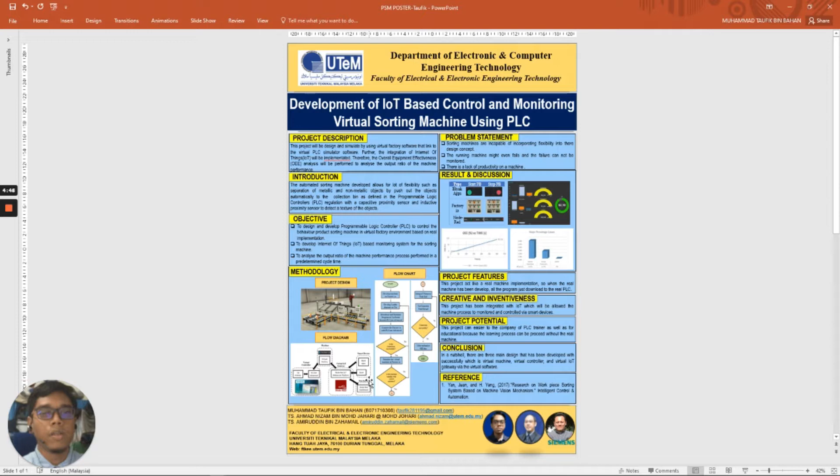Today I will present my final year project, which is mainly about the development of an IoT based control and monitoring virtual sorting machine using PLC. Okay, I will proceed with my presentation via poster. As I mentioned before, my project title is Development of IoT based control and monitoring virtual sorting machine using

PLC. For the project description, this project will be designed and simulated using virtual factory software that links to the virtual PLC software. Further, the integration of Internet of Things, IoT, will be implemented. Therefore, the overall equipment effectiveness, OEE, analysis will be performed to analyze the output ratio of the machine performance.

Next, for the problem statement: firstly, sorting machines are incapable of incorporating flexibility into their design concept. Second, the running machine may even fail and the failure cannot be monitored. Lastly, there is a lack of productivity on a machine.

For the introduction, the automated sorting machine developed allows for a lot of flexibility, such as separation of metallic and non-metallic objects by pushing the objects automatically to the collection bin as defined in the programmable logic controller, PLC, regulation, with a capacitive proximity sensor and inductive proximity sensor to detect the texture of the objects.

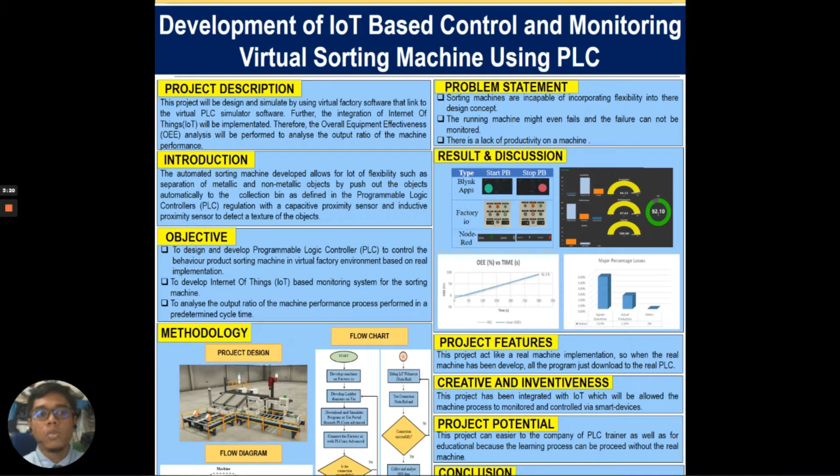The objectives of my project are to design and develop a programmable logic controller, PLC, to control the behavior of a product sorting machine in a virtual factory environment based on real implementation; next, to develop an Internet of Things, IoT, based monitoring system for the sorting machine; and lastly, to analyze the output ratio of the machine performance process performed in a predetermined cycle time.

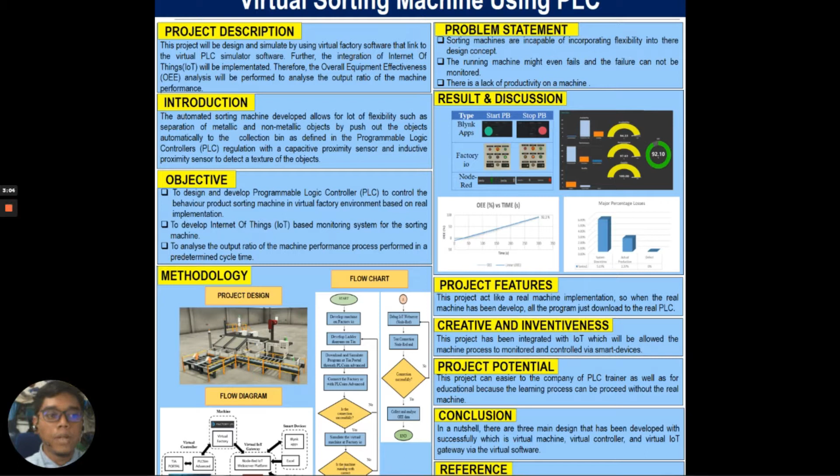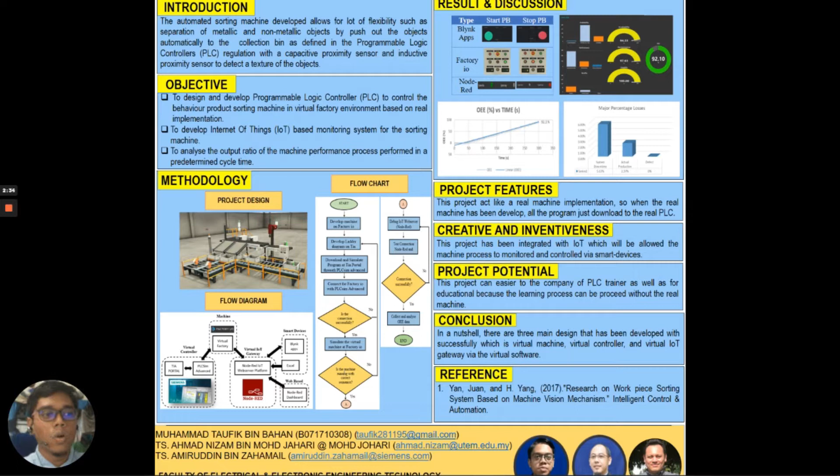For the methodology, this is my project design that I designed in Factory IO, which is the virtual factory software. This is just like a real machine implementation. What we can see here is a real conveyor and real solenoid actuators, solenoid valves that push the metal or non-metal object to the collection bin.

This is my flow diagram: firstly the virtual controller, then the machine, then the virtual IoT gateway, and then integration with smart device and web base. Firstly, the TIA Portal is linked to PLCSIM Advanced as the virtual controller of this machine, then integrated with the virtual factory, Factory IO, which is this design, acting like a real machine.

Then it goes to the virtual IoT gateway, which is the Node-RED IoT web server platform. It will send data for controlling and monitoring the machine process via the Blynk app and Node-RED dashboard. This Excel is to log the OEE data produced by the machine in 5 minutes.

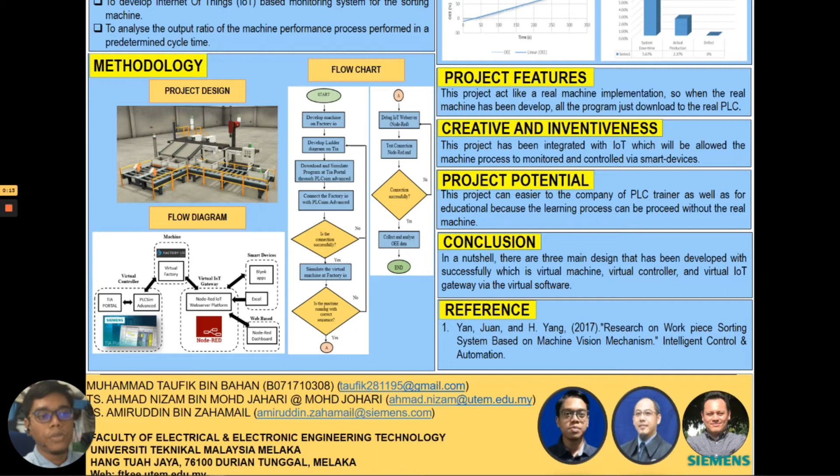This is my flowchart. Firstly, start, then develop the machine on Factory IO. Next, develop the ladder diagram on TIA Portal. Then download and simulate the program at TIA Portal through PLCSIM Advanced. Then Factory IO will connect with PLCSIM Advanced. When the connection is successful, the virtual machine at Factory IO will be simulated.

If not, it goes back to developing the ladder diagram again. If the machine runs with the correct sequence, the IoT web server can be debugged. If not, go back to develop the ladder diagram on the TIA Portal. When the IoT is successfully debugged, test the connection of Node-RED with PLCSIM Advanced and Factory IO.

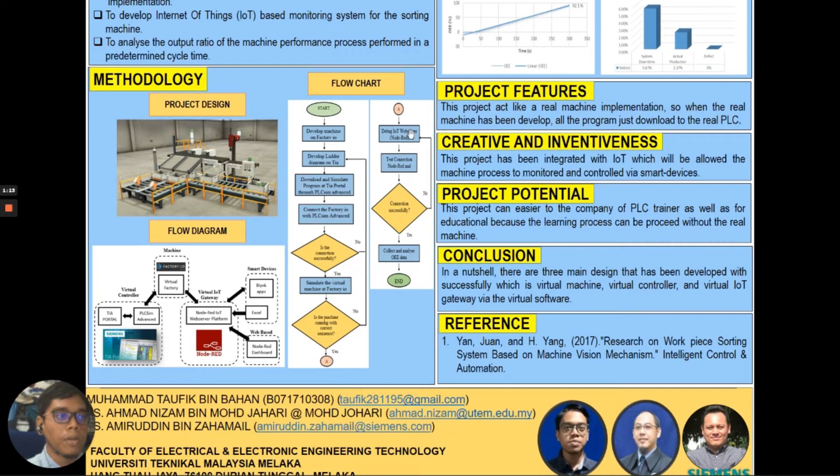If all the software is connected, which is PLCSIM Advanced, TIA Portal, and the IoT web server, then collect and analyze the OEE data. If the connection is not successful, go back and debug the IoT web server. It may be caused by the flow nodes or the programming at the IoT. Then end the project.

For the results and discussion, this is my Blynk app, Factory IO and Node-RED. When the start PB is pressed, the Blynk app shows a green light, Factory IO also turns green, and at Node-RED the green light is turned on. When the stop PB is pressed, the Blynk app shows the red light turned on, the same with Factory IO as well as the Node-RED dashboard.

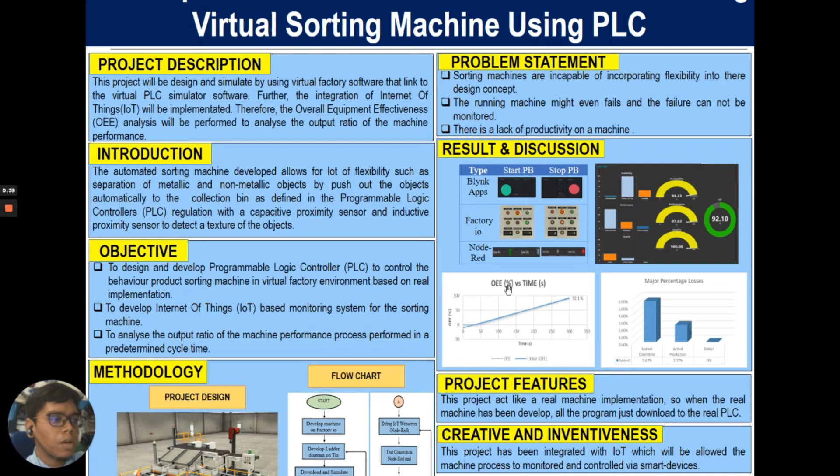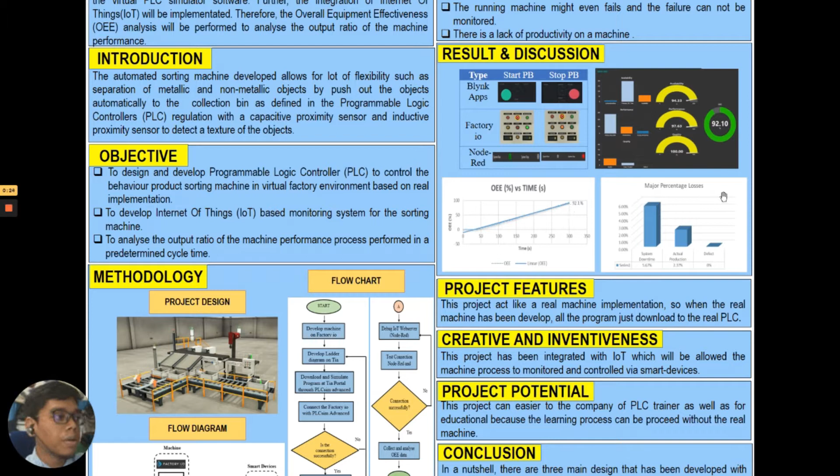This is the OEE data developed at the Node-RED dashboard. This is the calculation to find the availability, performance, and quality. This is the percentage of availability, performance and quality. Then this is the OEE percentage. This is OEE percentage versus time in seconds, which is 92.1%. This is my major percentage losses, which consist of system downtime, actual production, and defects.

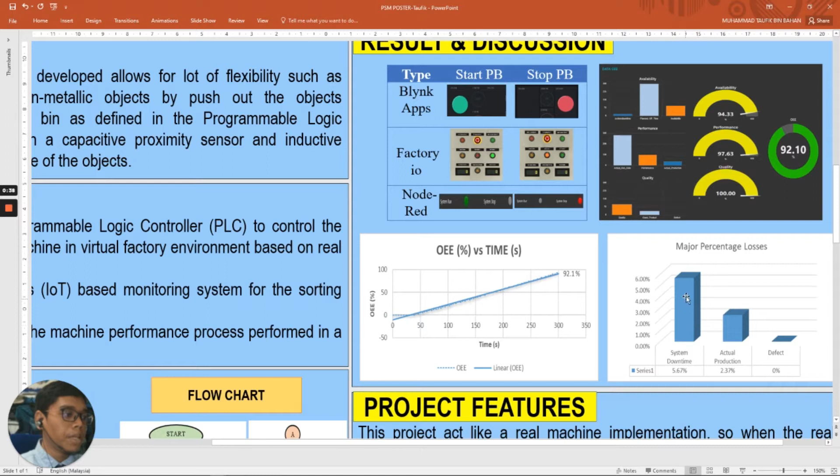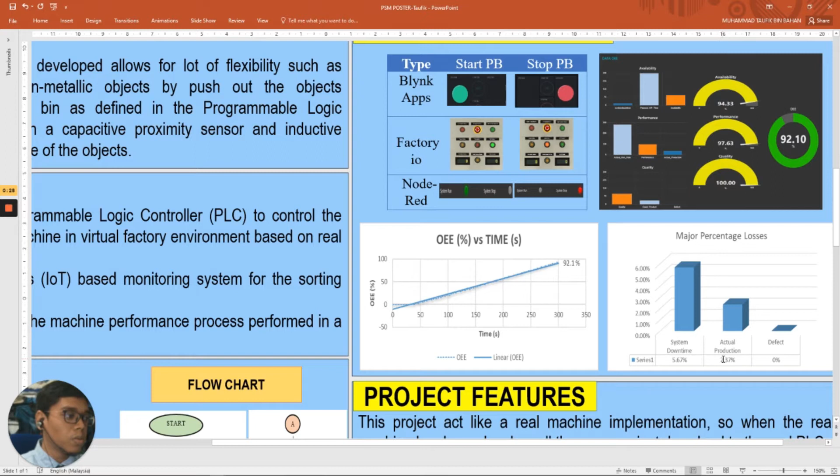The main defect for the OEE percentage is system downtime, which is 5.67%, then followed by actual production, which is 2.37%, and defect is 0%.

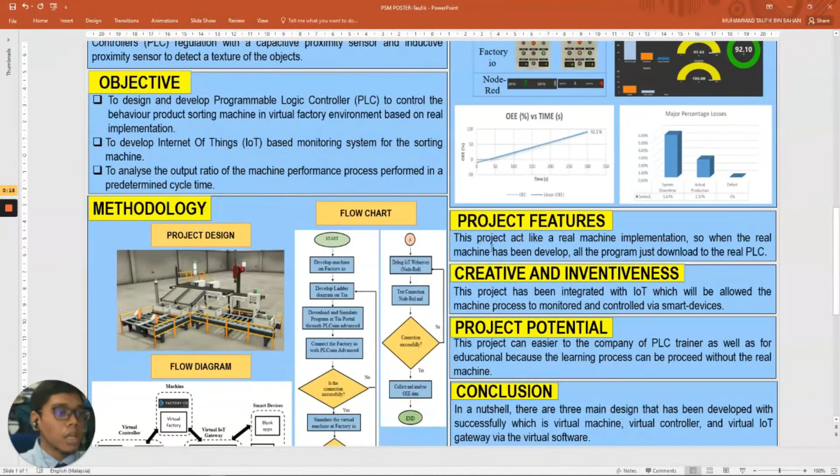Next for the project features. This project acts like a real machine implementation, so when the real machine has been developed, all the program is downloaded to the real PLC.

For the creativity and inventiveness of this project, it has been integrated with IoT, which allows the machine process to monitor and control via smart device.

Then for the project potential, this project can be easier for companies with PLC trainers such as Siemens company, as well as for educational purposes, because the learning process can proceed without the real machine.

For the conclusion, in a nutshell, there are three main designs that have been developed successfully, which is virtual machine, virtual controller, and virtual IoT gateway via the virtual software. Besides, the analysis is already done by interpreting the overall equipment effectiveness OEE analysis into the design.

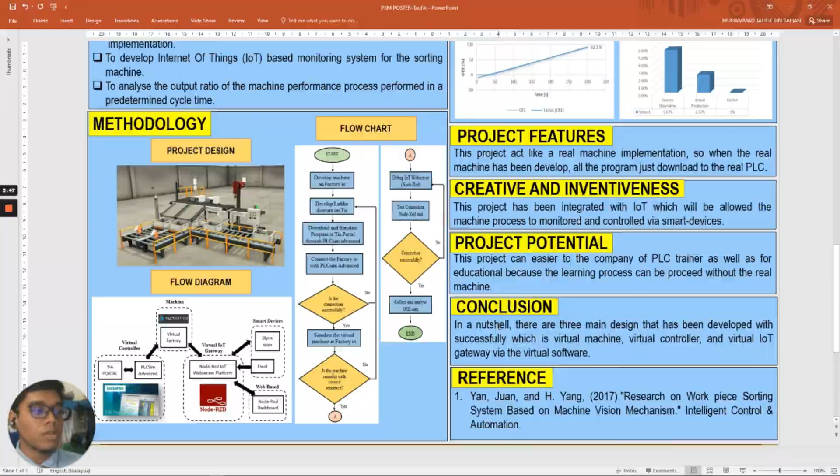We start the project demonstration. Firstly, open the TIA portal, which is Siemens software. Then open PLC SIM Advanced.

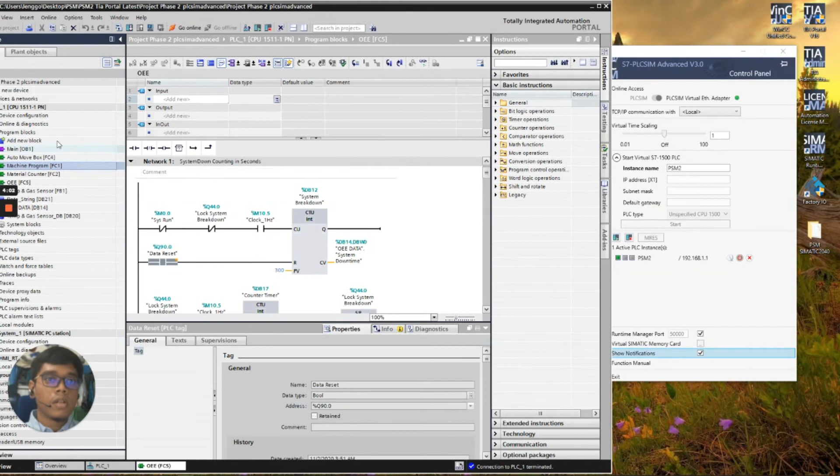Then start. This is the IP address for the PLC, and then download the program. This is all the program.

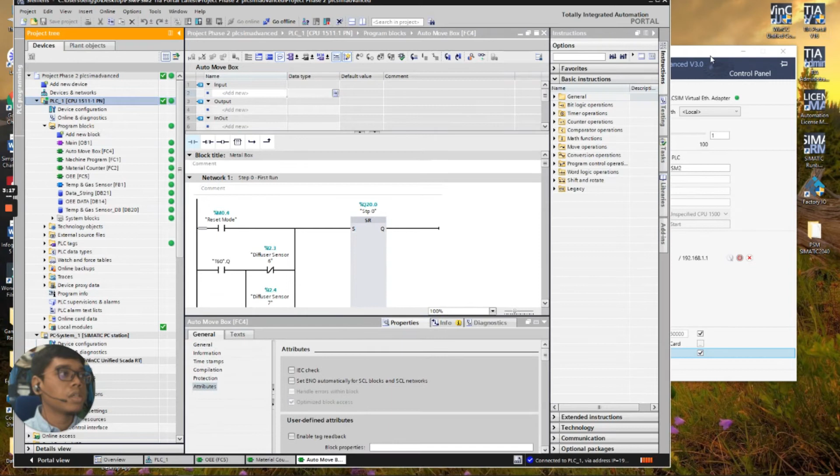Okay, just go online. This will go online automatically when the indicator gives the green light, so all the connection is successfully downloaded to the PLC SIM Advanced.

Then next open the Node-RED, and CMD to run the Node-RED.

Then next open the Node-RED web server at the browser, which runs at 127.0.0.1, the IP address. As you can see here, all the parameters have been connected successfully.

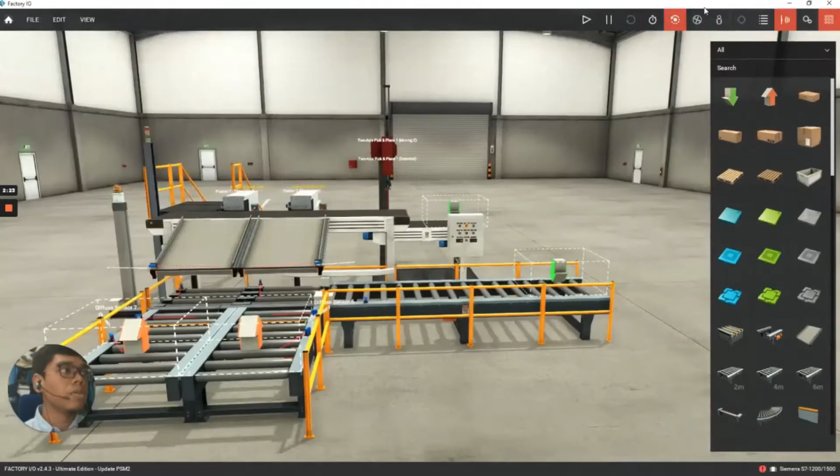Then we go to the factory IO, then select the driver to select the Siemens S7 1500. Just connect to the PLC, and this shows the connection is already successful.

So we run simulate the factory IO. This is the design. This is the initial condition. This is the machine process, in which the non-metal material will be stored here.

And the metal material will sort at here. So after five products have been sorted in this box, the box will go to the last end process, which is remove the box. So we can look at the Blynk application also.

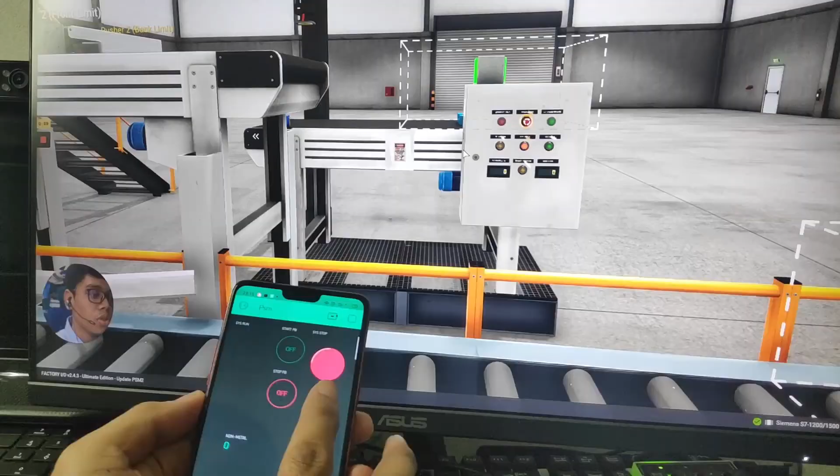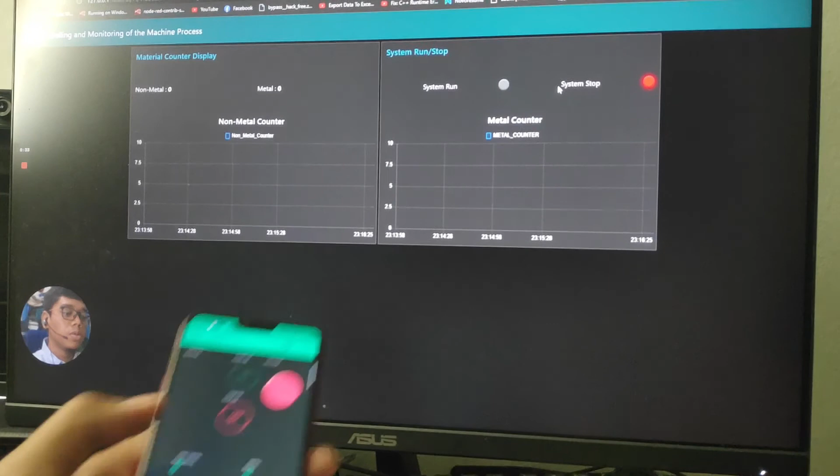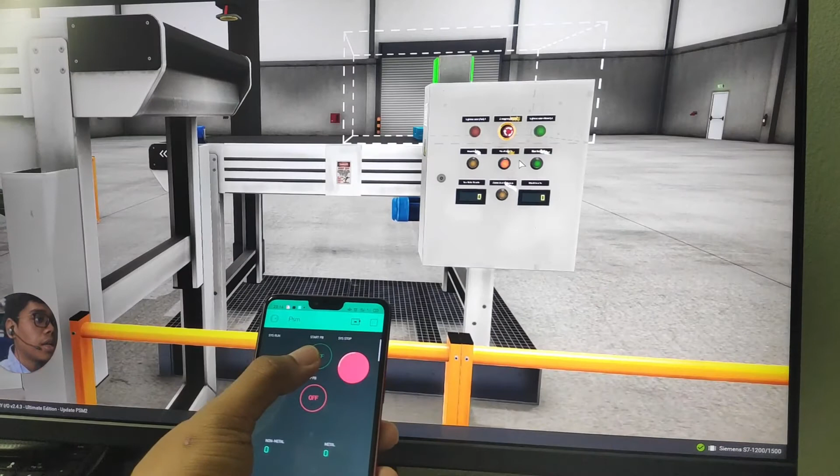The green light is the same with the factory IO, and also same with the Node-RED dashboard. It will show the red light, and it blinks also red light, and at the factory IO also the red light. So all the connection has been successfully connected.

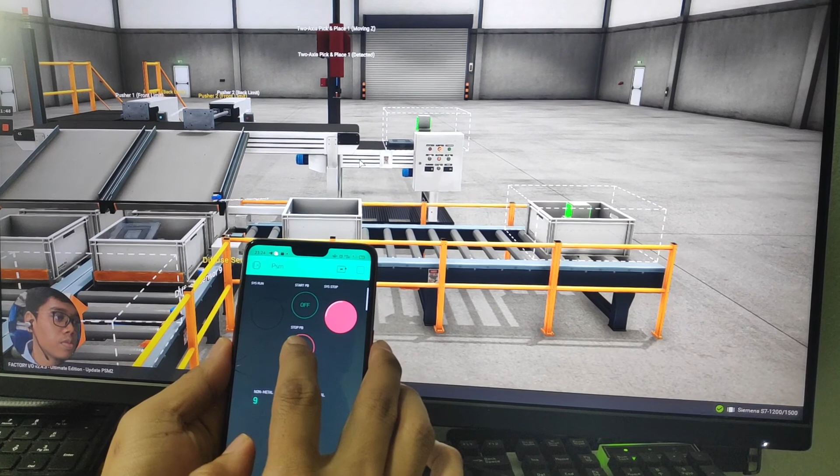We also can stop the machine, which is stop. So the machine, all the progress will be stopped, and we can start back. The machine will run continuous with the previous step.

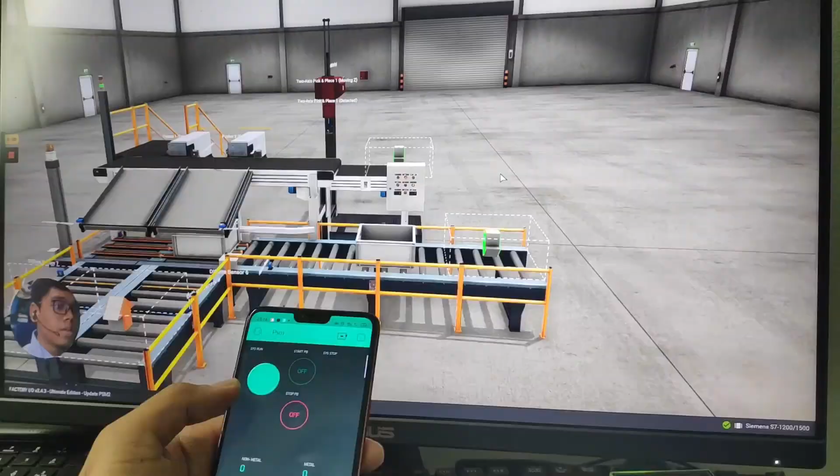The value is still changing because the machine operation is still turned on. So the machine is already turned off, so it means it has achieved the 5-minute duration time.

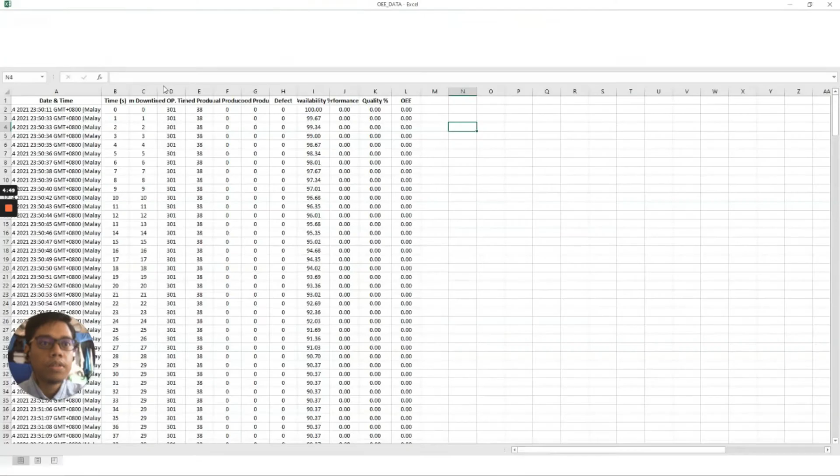This is the OEE data that has been logged in Excel format from the Node-RED web server, saved to my computer, and this is the data for 5 minutes duration.

So this is the time. We can look here, 300 seconds is equal to 5 minutes duration.

So this is the parameter that we want to log the data, and this is availability, performance, and quality percentage.

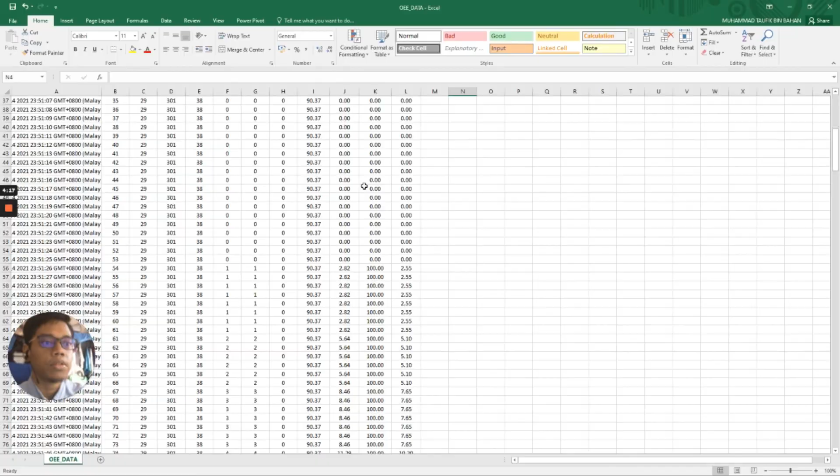Last we proceed to the WinCC Unified, which is to monitor the temperature surrounding and the leaking of gas at the factory. So just start the simulation

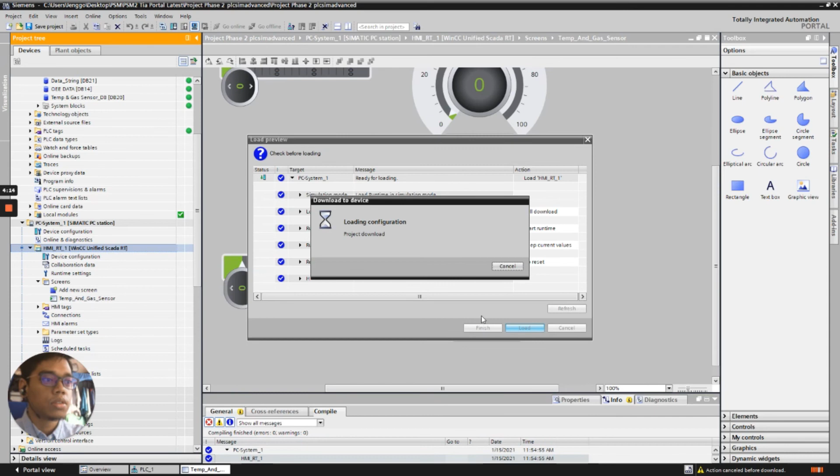and load. The simulation is already running at this SIMATIC Runtime Manager, and open the browser, find the local host, WinCC Unified localhost, and click WinCC Unified RT.

Then this is the temperature sensor. This is the gas sensor. This is like analog sensor input, and this is also for the gas analog input.

So analog is for just like that. The value from analog is red, so the temperature is 45%, so it gives a warning. If less than 40 degrees, it will display good.

Same with this gas sensor. If the analog sensor reads more than 40, it gives a warning. If less than 40, it will display good.

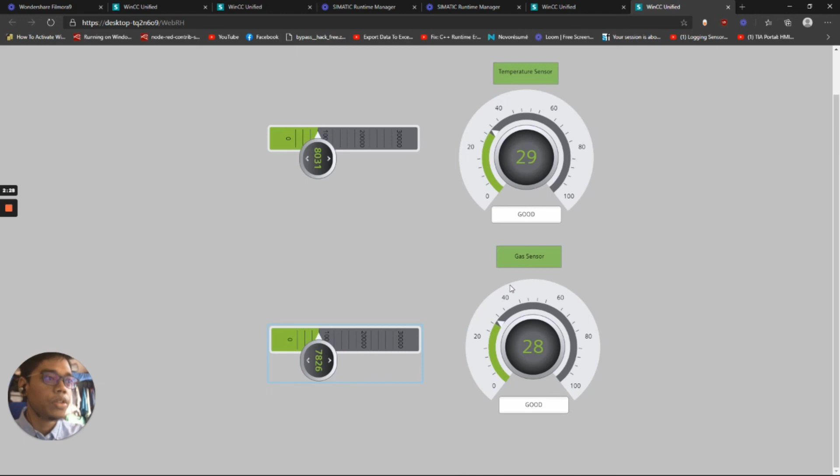I think that's all for my final year project presentation. Thank you very much.